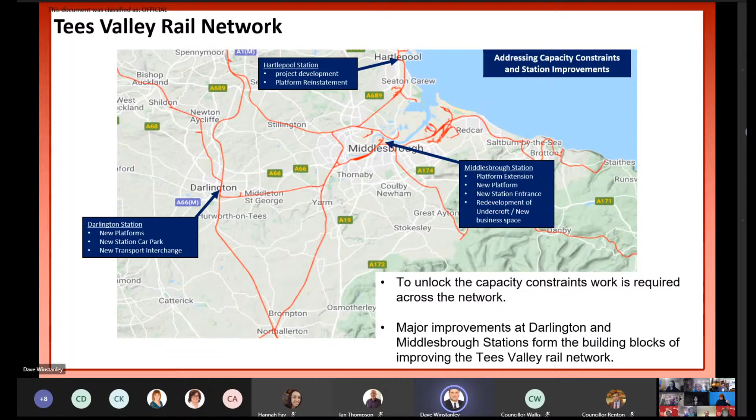Part of the Tees Valley strategy requires some capacity constraints to be unlocked. The key ones, and the foundation for this plan, are at Middlesbrough and Darlington. I'll be talking about the Darlington Station plans today, but there are similar plans and projects going on at Middlesbrough, and some development work being done at Hartlepool, where they've got a single platform station and potentially need further platforms reinstated.

So the project objectives go back a number of years - we want to transform Darlington train station into a modern transport hub. It hasn't had significant investment for a number of years now, and we really want to transform that into a new station fit for the 21st century. We want more frequent and faster local and national services, but we also want to future-proof the station for the needs of the railway in the future and make sure those local services can continue to be used.

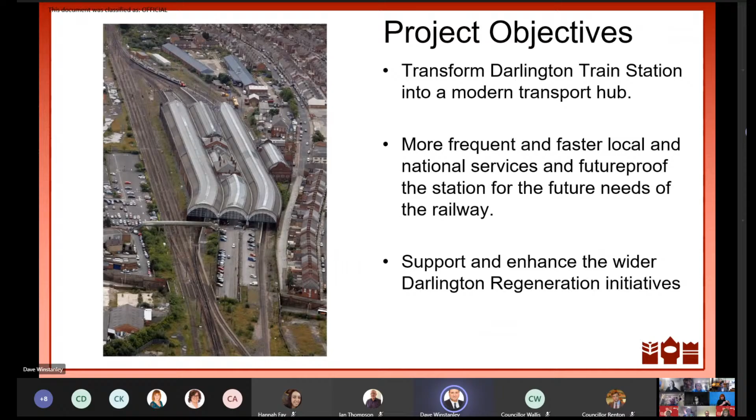We also want to support and enhance the wider regeneration opportunities that an East Coast mainline station gives to Darlington and the Tees Valley.

The next slide shows how it all fits together, and I know you've got a presentation later on about the Railway Heritage Quarter - but the station's a key component of our regeneration plans. The blue area there is the station project. We've got Central Park, which is growing and developing fast - we've just recently put the bridge across there. We've got the theatre that's recently been refurbished, and the children's theatre on Parkgate. We've got the town centre strategy coming forward, and all those linked together form our strategy going forward to regenerate and bring forward Darlington.

Tees Valley, Darlington is the only East Coast Mainline station, as I've said before, and it's a potential future Northern Powerhouse Rail and HS2 station. That will give much wider and faster access in the future to the rest of the country, making Darlington a very accessible place.

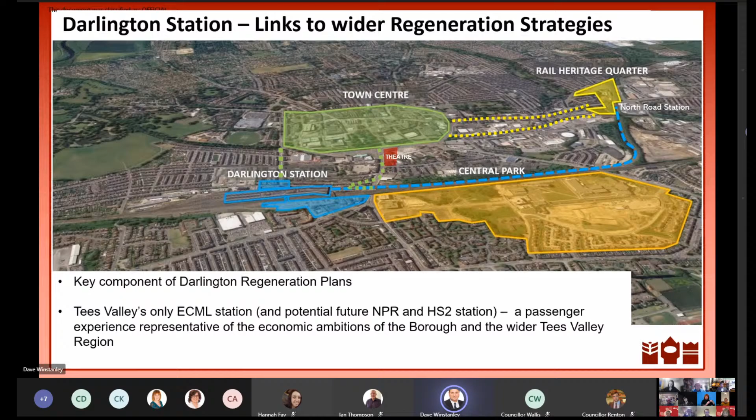If and when HS2 arrives in Darlington, that will cut the journey time to Birmingham by 52 minutes, making it 1 hour 29. It will cut the journey time to London to 1 hour 52, saving 28 minutes. So we're preparing to accept that greater accessibility.

This is a bit of a technical slide just to explain the current configuration at Darlington Station and why the current arrangements cause problems between local services and national services. The blue line is the East Coast Main Line. Darlington Station is on the west side of the East Coast Main Line, which means anything coming from the Tees Valley has to cross the East Coast Main Line to get into the station at South Junction. So Tees Valley lines have to cross and get into Darlington Station, either docking in the bay platforms 2 or 3, or platform 4.

What that means is it takes a lot of time out of the East Coast Main Line for a slow-moving passenger train to get across the South Junction and into the station. That takes up a lot of capacity for national train services going north-south, up and down the East Coast Main Line. Similarly, at North Junction, you've got to cross the Scotland-bound line to get into the station, which once again causes capacity issues on the East Coast Main Line, limiting the amount of services that can run.

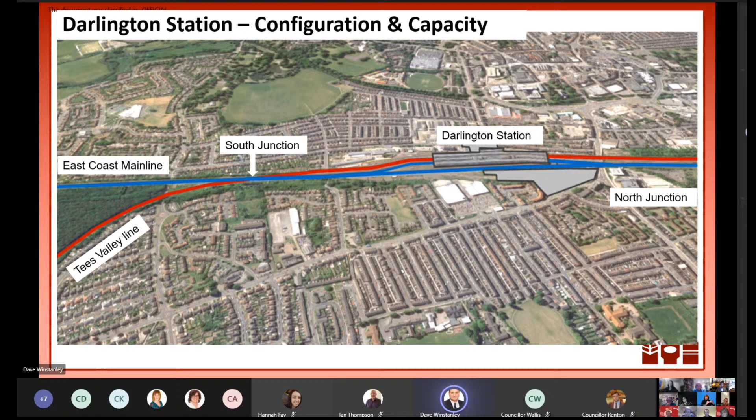So what we've done in terms of design and a solution to that is develop a new arrangement. The new configuration at Darlington Station will see the Tees Valley line brought round parallel to the East Coast Main Line and come into new platforms on the new station.

There will still be the facility to cross South Junction if there's capacity, and come into Darlington Station and go off along the Bishop line if there's capacity to get across that South Junction. There will also be provision for a new London-bound platform built on the east side. So if you're going into the Tees Valley or London in the future, you'll use the new station, and if you're coming to or from the Bishop line or going into Scotland, you'll use the existing station.

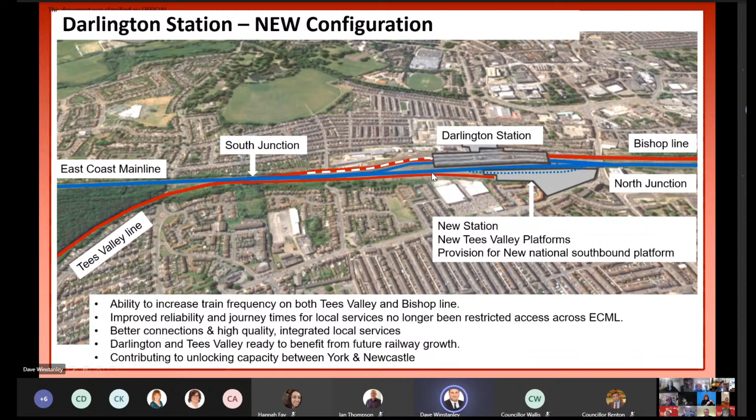That removes the need to cross the East Coast Main Line and creates capacity to expand services on the Tees Valley line, the Bishop line, and the East Coast Main Line. In terms of project delivery, we've split the project into a number of stages or elements.

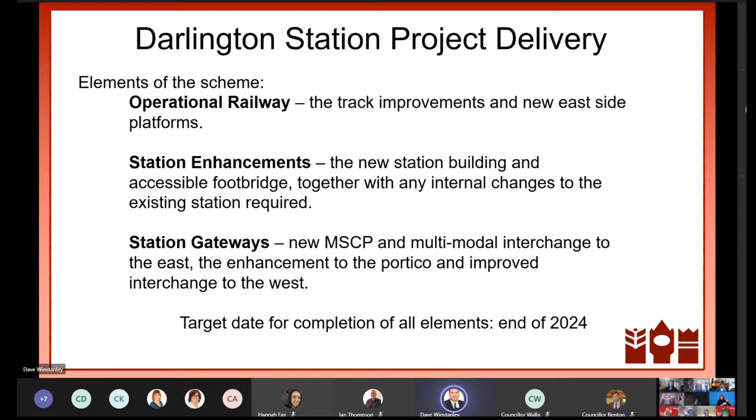We've got the operational railway, which is track improvements and new east side platforms; station enhancements, which is the new station building, an accessible footbridge linking the new station with the old station, and internal changes to the station; and the station gateway project, which is a new car park, a multimodal interchange, and enhancements to the portico, an improved interchange on the west side. Both approaches from both sides of the station are improved with transport interchange, and the target date for completion is the end of 2024.

I'd like to take you through the various elements of the project quickly so you understand what's going on. We've broken it down into various stages. We've got the Victoria Road interchange, and the Victoria Road improvements that are ongoing at the moment. They improve the pedestrian and walk-in route to the town centre, which is a key link into the town centre strategy. So the Victoria Road interchange will see better pedestrian, cycling, and bus interchange provided at that location.

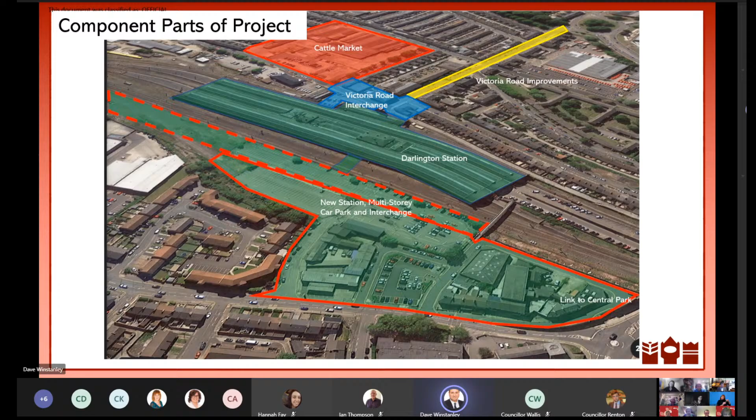We've got Darlington Station itself, and we've got the new East Side interchange and station. For Station East, as we call it, the new station, you'll have provision for an East Coast Main Line South platform, and the Tees Valley platforms. We'll have a new station building with modern facilities and retail, and a new bridge from the new station to the existing station, going through the shed and into the area where currently Pumpkin and WH Smiths are based, landing there.

We'll have a new multi-storey car park that provides capacity to help with rationalisation of parking, because we don't want parking in the portico area or up and down the ramp. There's a new transport interchange for pick-up and drop-off and bus replacement services, and we're also looking at improved walking and cycling links throughout the station.

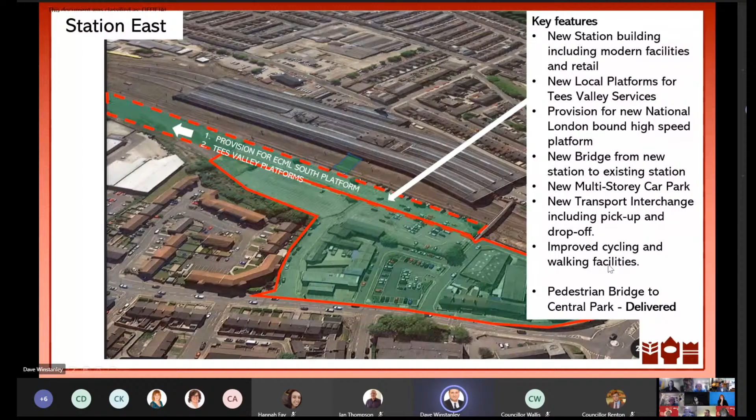In terms of the station itself, we've got the portico improvements. We want to make sure the station's got access-for-all enhancements. Currently the ramps, steps, etc. aren't particularly disabled-friendly, so we want to introduce lifts and facilities that make it accessible for all. We're working on the customer experience to enhance that, and we're looking at improvements to the subway from the improved portico area.

We're looking at rationalisation of the parking and access to make it a friendly environment in the portico. Most people who've used the portico entrance on Victoria Road have probably had to dodge cars dropping off and other vehicles going in and out of that area, which is very tight, and reversing cars from the parking spaces, etc.

There'll be a bridge, an accessible bridge throughout the station, making the interchange between platforms efficient and effective.

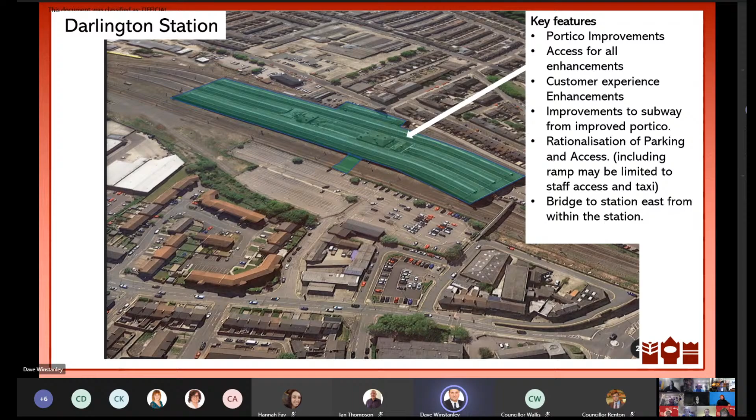At the Victoria Road interchange, we're looking at new pick-up and drop-off facilities to replace the ones in the portico, new bus stop facilities, walking and cycling improvements, and an improved public realm. The first impression of Darlington for some people is as you walk out on Victoria Road, and we want to improve that feel, look, and public realm, and make it a pleasant walk down to the town centre.

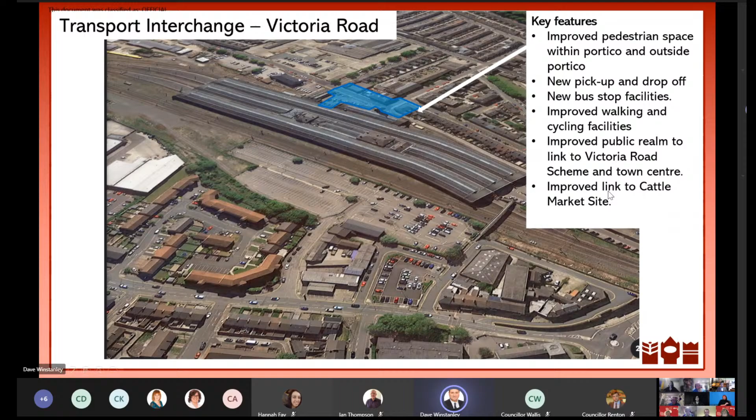It will also provide an improved link to the cattle market site, which has recently come into the council's ownership.

In terms of delivery, there's quite a significant project management and governance structure around this with all partners: TVCA, DFT, Network Rail, London, LNER, Northern. The project's been run in two phases. Darlington Council will design and build the station gateway on the east side, including the multi-storey car park, the station shell, and the interchange, through the SCAPE framework.

25 million has been allocated from TVCA to be committed by March 23. The current milestones are starting the CPO process in January 21, getting planning permissions in spring 21.

Construction begins winter 22, operational March 24. In terms of the major rail and station enhancements, that's led by Network Rail, who have engaged BAM Nuttall for a design build process. The DFT have allocated up to 8.7 million for the design stage. Their targets are getting a decision to deliver September next year, completing the design June 22, construction starting January 23, with construction complete in May 24 and the new track and station operational December 24, ahead of the celebrations for 2025.

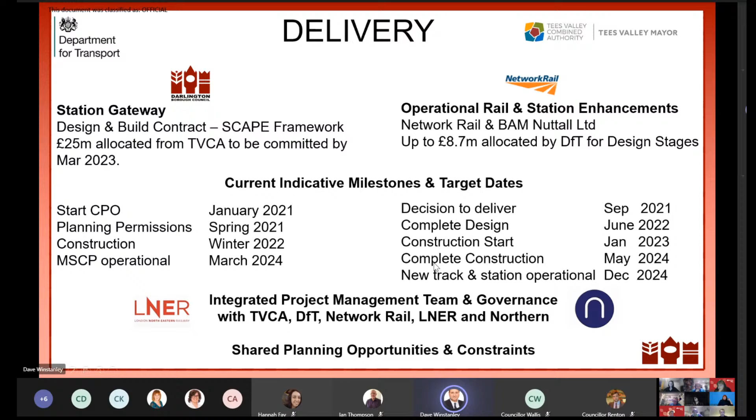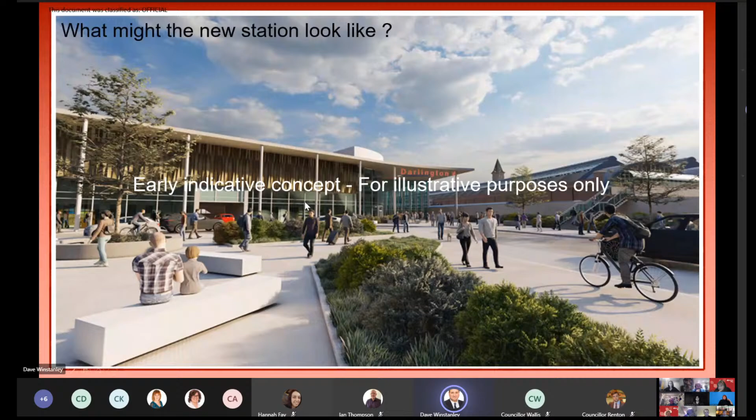That's an early indicative concept. It will change, but it shows the new station on the east side with the multi-storey car park, entrance to the station, new platforms, a bridge across, and the public realm, which will have a transport interchange. Thank you, Chair.

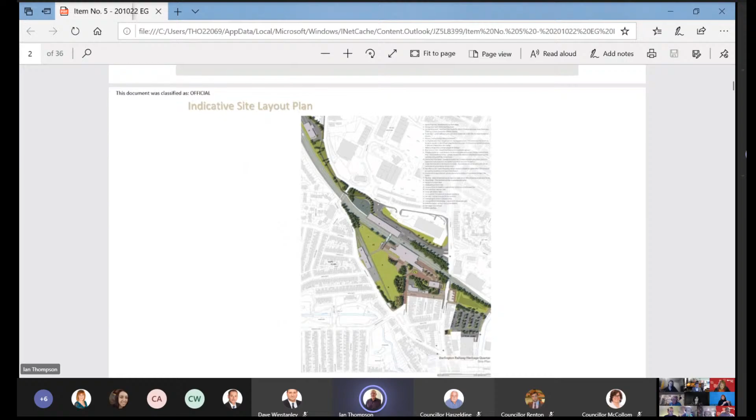Members will have seen the site in previous presentations. Again, this is just to remind members, you've got the car park area here, which will be developed as part of the scheme. The logic for that is because it sits right next to the Skerne Bridge, so we want people arriving by car to start the journey with the Skerne Bridge, which, as you all know, is the oldest operating railway bridge in the world. We'll have interpretation down here and potentially virtual reality where you can point your phone up at the bridge and see loco number 1 going across there.

We'll walk up and across North Road. There'll be a new crossing on North Road at McNay Street. McNay Street will be closed to through traffic, and it will be for residential only. You will enter the site through the goods shed, and McNay Street will be reprofiled. You'll have a plaza between the goods shed and the Head of Steam Museum.

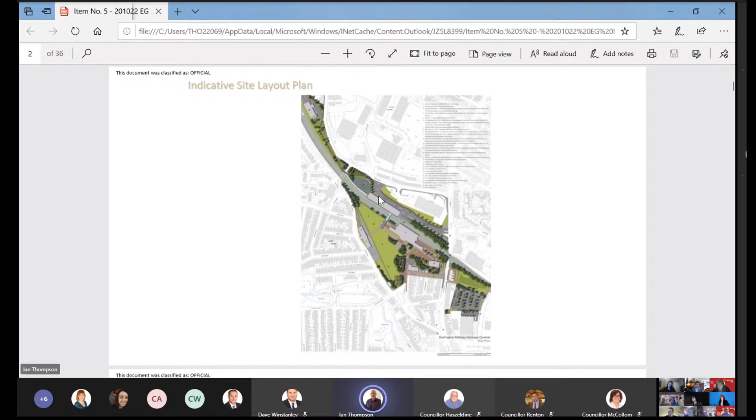We'll have a new build shed over on Bonomi Way, on the other side of the railway line, which the A1 Trust will be relocated into, with a bridge going across and landing within that building. Then at the bottom end of the site, you've got the old 1861 shed, where we are looking and working with DRPS and NELPG, and they will relocate into there. There'll be a private siding coming off the main line that will feed the 1861 shed and also the new A1 Trust shed, so we can run steam on it, and they can bring engines in without necessarily having to use low loaders.

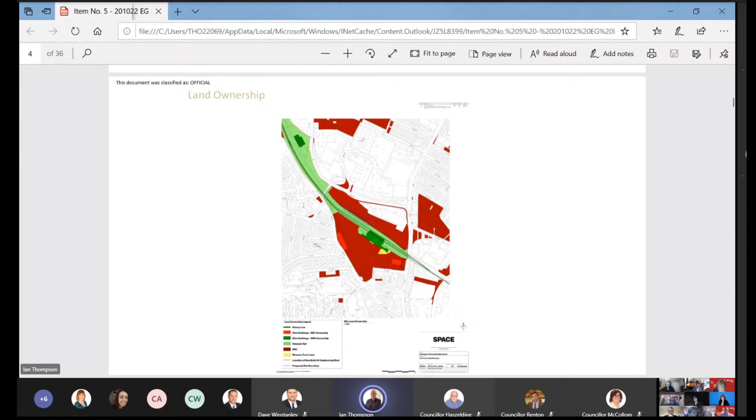This shot here is basically the land ownership. The pale green is what's in Network Rail's ownership, which we're currently negotiating with them regarding what land we want from them, and also the two dark green buildings. The 1861 shed is Network Rail's, and also the Head of Steam is Network Rail's building. We have a 200-year lease on that building, of which I think there's about 150 years left, so we as good as own it. We obviously own the goods shed and the carriage works, and the purpley brown is the land that we own. There's a small yellow bit within the site that is Museum Trust land that we're currently in negotiations with them to acquire.

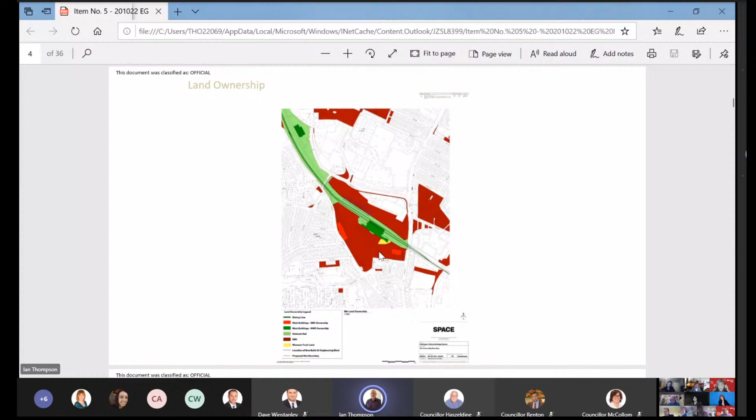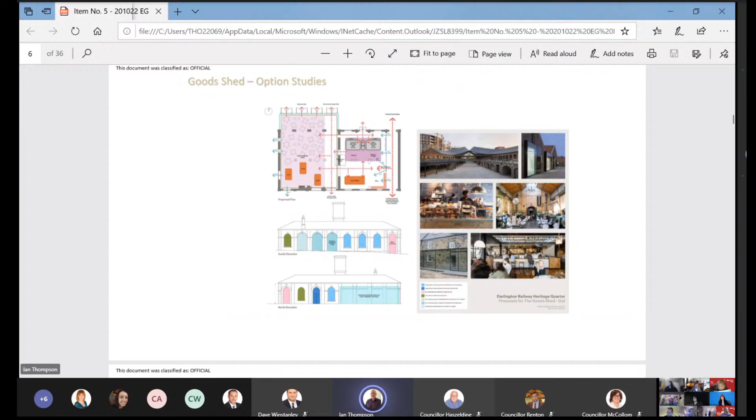Moving on to the specifics of the site, the first building here is the goods shed, which is the one where we will enter the Railway Heritage Quarter. You will enter the site through one of the archways, and the intention is that you'll be able to go all the way through here and onto the rail platform, so that anybody going on into the rail station will pass through the site.

Or you can turn left into the goods shed prior to getting the train, if you wish to grab a cup of coffee and off you go. You'll also still be able to access the railway platform from the corner of McNay Street and North Road, for when the goods shed is closed, so people can still get access to the platform. Within the goods shed, we'll have the catering cafe facility, as well as secondary retail spend, shop, and toilet facilities as well.

The orangey coloured splodges on here are just indicative. Obviously you'll have objects, so you might have some trains displayed in here, and other appropriate objects displayed within the goods shed, and then a cafe laid out.

On this plan, some of these things may or may not come to fruition as we move forward. There's obviously a glass frontage put onto the goods shed to extend the footage there, but not interfering with the structure of the goods shed, and retaining all its features.

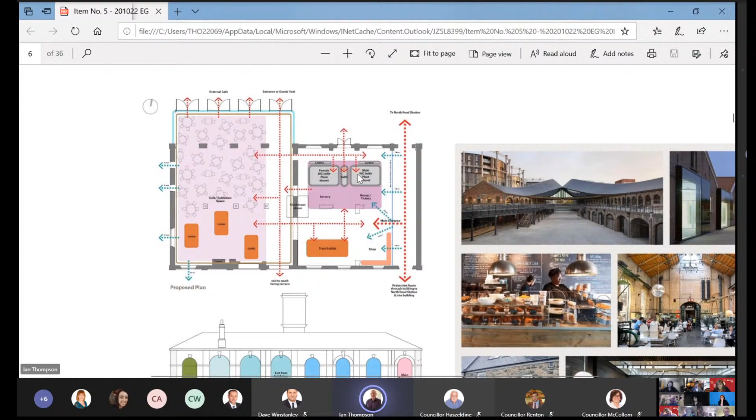Any interventions we make won't necessarily touch the fabric of the goods shed other than the floor. So in future years, when things change, those can easily be taken out, and ultimately the goods shed is as it was. We're not intending to make any significant structural changes. And with it being listed, we've got to work through appropriately with conservation and Historic England.

Looking from McNay Street, this is the elevation you would see, and then looking from the head of steam site, you'd see this elevation with a glass extension on the side.

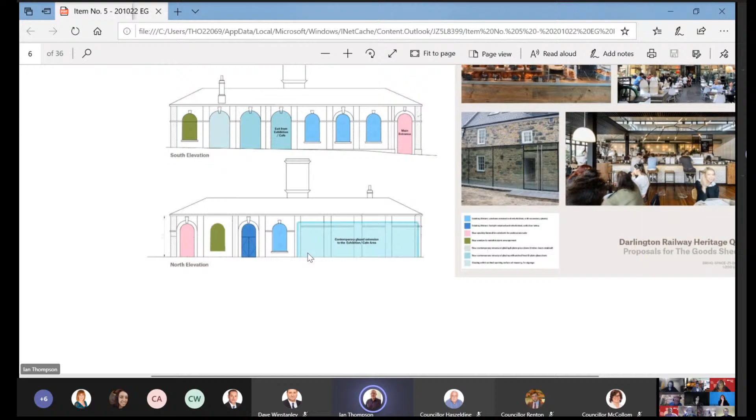Moving on, these are again sort of artist impressions of what it may well look like, so don't hold me to account. These are just early impressions, concepts.

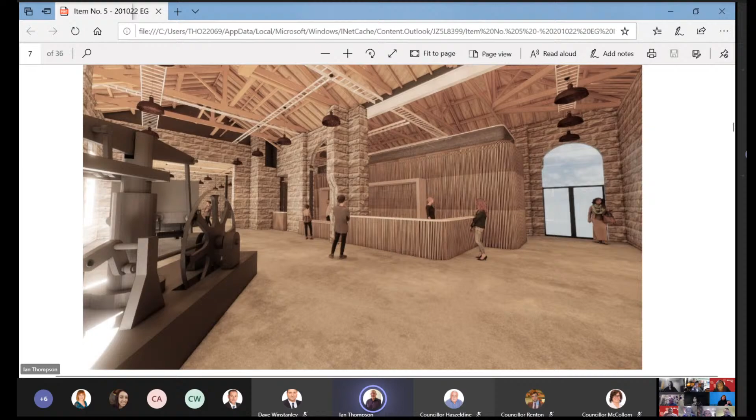As you see, the doors in this corner will be where you walk through onto the railway station, or you turn left into the goods shed, with your counter and catering in this particular area, and exhibits. Then as you go through on the other side, you've got your cafe area, and again exhibits throughout.

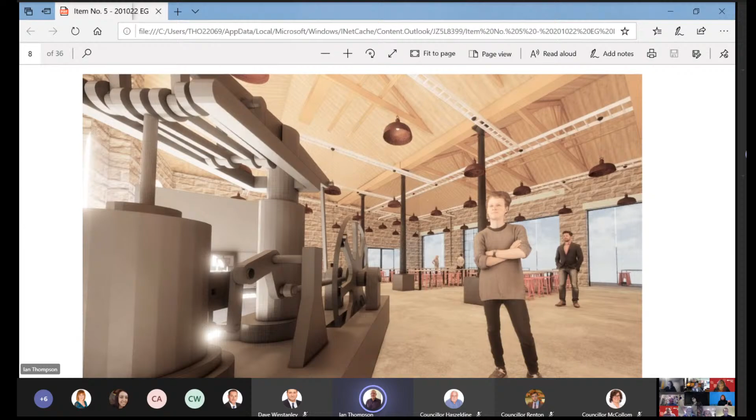Again, the key is to actually celebrate this building, so the building is part of the experience as we go through.

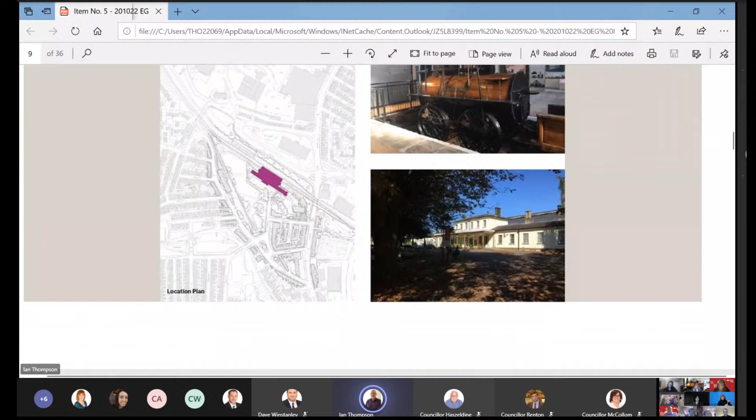Moving into the head of steam itself, the museum as is, this element of the project is the least developed at this moment, and the reason for that is we wanted to be in a position where we had the interpretation designers on board, because the interpretation design is key to making this the element we want.

This is where you're going to get the wow, and you're going to get the experience of the augmented, the virtual reality, and everything else within there.

As we've talked about before, potentially what that will be is you'll go into something that looks like a railway carriage, and you will sit in there surrounded by screens and projections, and you will also experience smells and heat and everything else. Ultimately you'll probably start travelling on the back of loco number 1 in 1825, work through time, and end up, however, in 2135, or whenever it is, who knows.

Part of the creation of some of the stuff we want to do in here, we want to use local residents to be part of these films. So you bring local people into this process, and there'll be variants of the ride - some might be Easter themed, Halloween themed, Christmas themed.

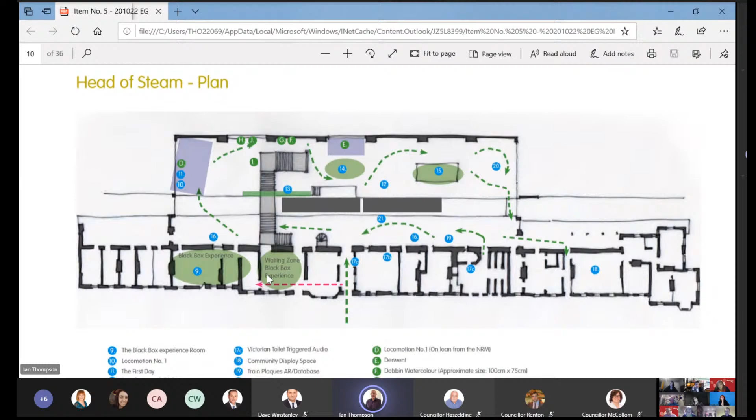Once we get a little bit further down the road on interpretation, I'll bring a presentation back for members to go through exactly what that's starting to look like and how that's developing. Again, these are just concepts of potentially the head of steam visual as you walk in there.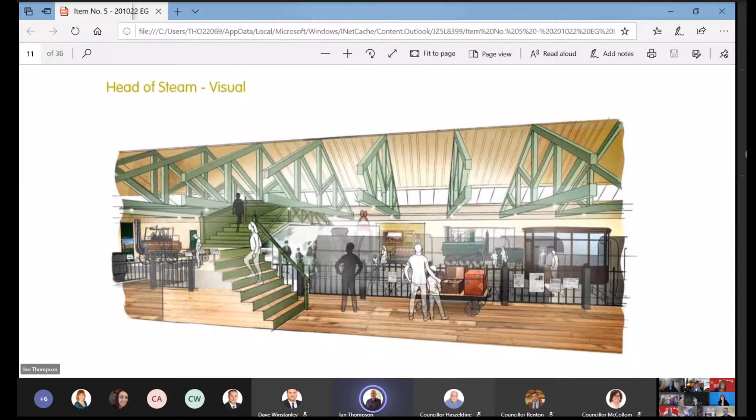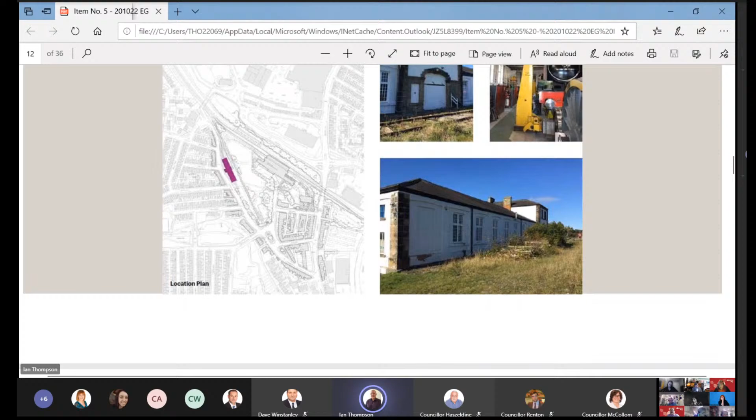Moving on to the carriage works, where currently A1 Trust and NELPEG are located. On the left hand side here will be an open exhibition gallery space for changing exhibitions, and on the right hand side will be the archive and some study rooms and meeting space for the archive, and also for working with partners in utilising that space.

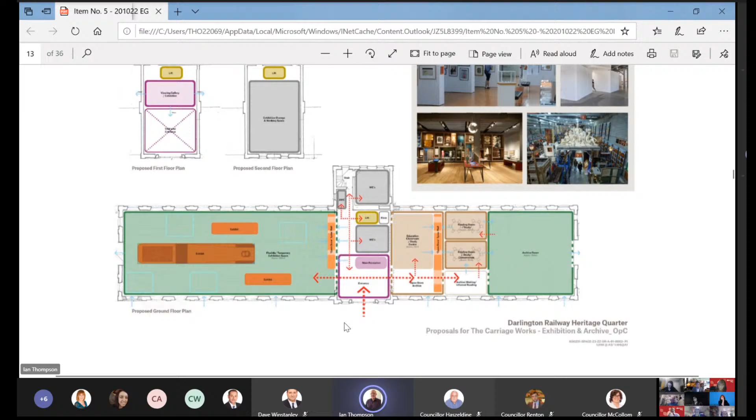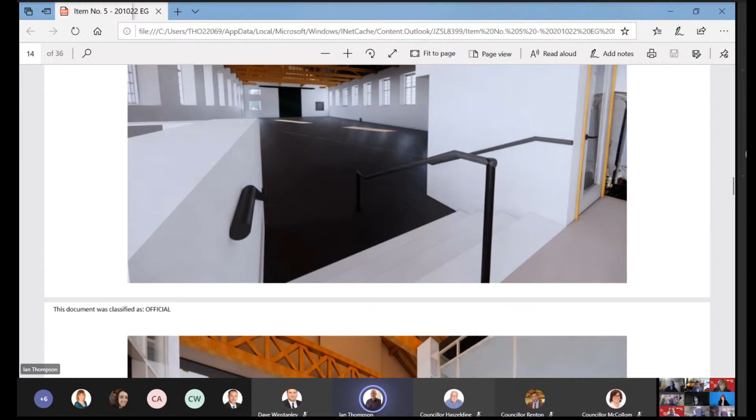Certainly probably in 2025, this space and potentially the archive space will be an ideal area to display the early engine exhibition we're looking to create, which we'll talk about later in the presentation. These are just visuals of what the space could look like - left hand side where A1 are, the open exhibition space, and the other side with the archive and meeting rooms and study rooms.

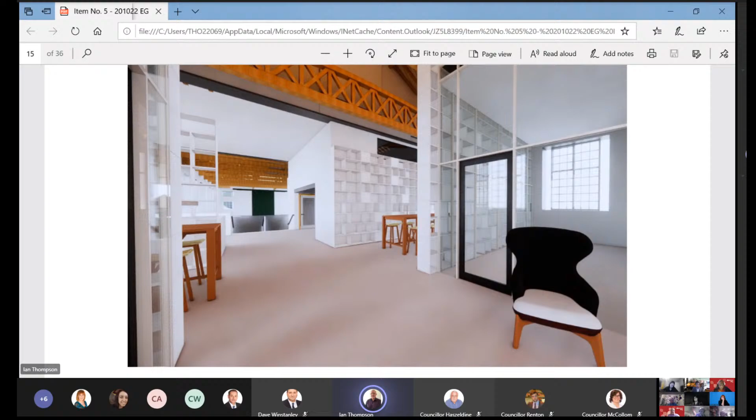Obviously the building itself tells the story. We'll not be making significant interventions into the buildings because the buildings are part of the authenticity and enjoyment of the site, and they are historic in their own right as a collection of buildings.

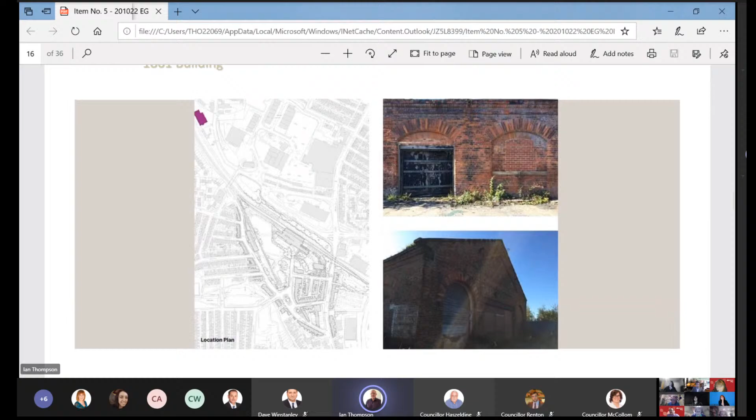Then the 1861 shed - if members aren't sure where that is, that's just off Whessoe Road, just past where the scrapyard is. We're in discussions with Network Rail about acquiring that, and ultimately we'll be looking to relocate NELPEG and DRPS in there, who we're working with at the moment. These are very early sketch drawings of where we're at in this process - we'll be looking to split that shed, one organisation in one side and one in the other.

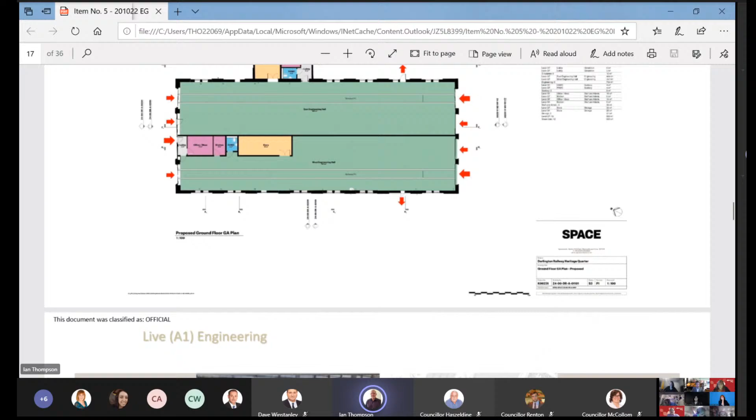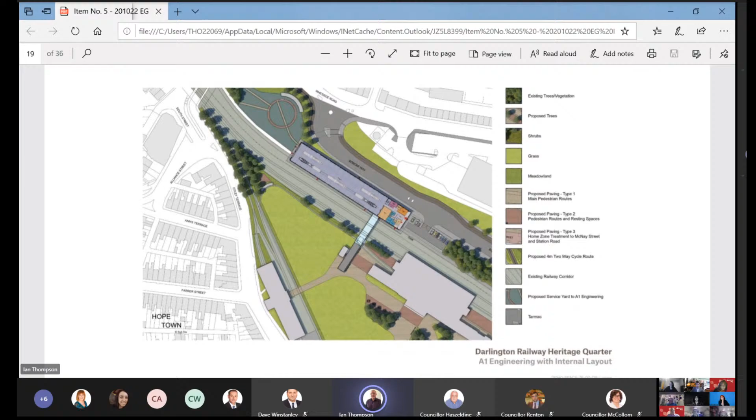This element here is a bridge going across the railway line, so you can get from here across to this side of the site, and you'll land at the top of this building here, where A1 will be located. You can see your tracks coming in with a turntable as well. Again, these are just sketches, but an artist's impression of the potential types of buildings and bridges going across.

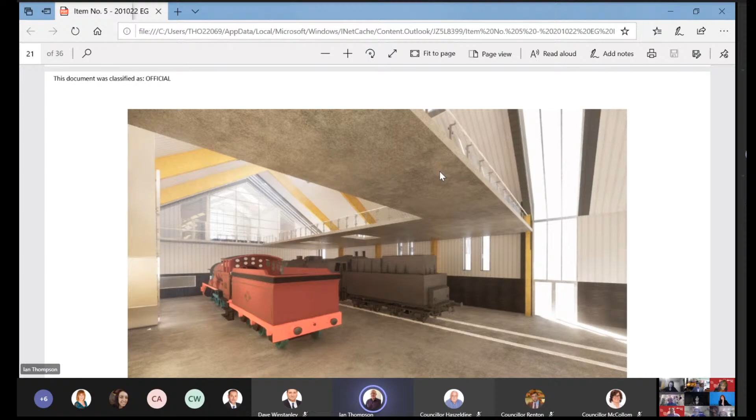Within that building, there'll be a viewing gallery above, so visitors to the museum and site will be able to go into that building and see what's going on underneath in the A1 - whether that's engines in there, work going on and building, and so on. People will get the opportunity to look in there, with interpretation as well.

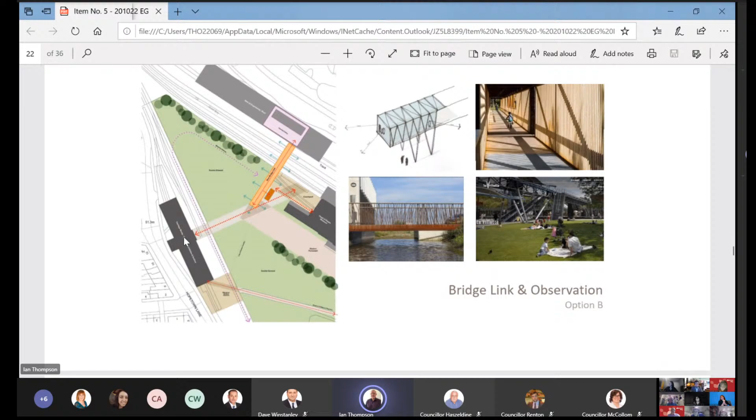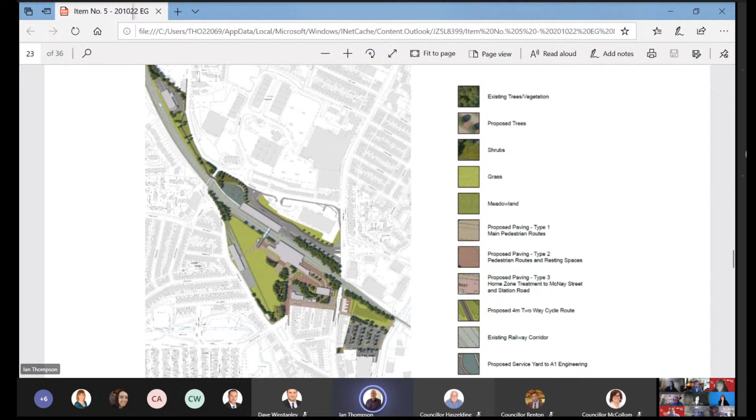In terms of the site, this is just showing the types of potential finishes we're looking at, where you've got hard landscape, car parking and other areas, plazas, and in some areas wildflower meadows and grassed areas. This slide is just showing the types of finishes we're thinking of currently for the landscaping areas, making the site appropriate and fitting for everything that's going to take place.

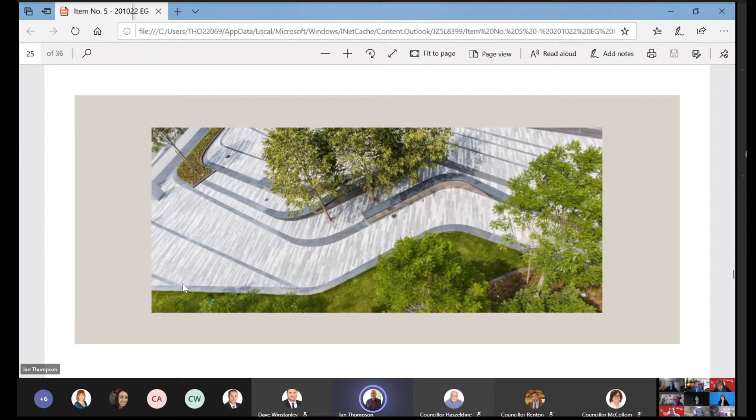This gives an indication of other sites where you've got paths weaving through wildflower meadows and meadowland. These are just precedent-type shots of types of landscape, and as you can see here, they're using the lines to reflect what tracks might be, through the hard landscaping as well.

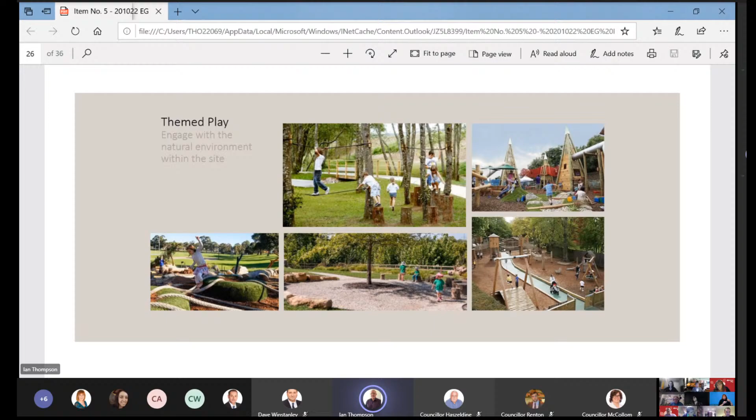And again, the trees will be brought into that experience as well. We'll be going out in the new year to engage expert designers in terms of outdoor play provision, because ultimately what we want here is something that isn't any play area in any town. It's something that really is meaningful, and it creates a wow feature in itself, a feature that children want to come back to regularly, which means mum and dad have got to come with them, and therefore experience the site and use the other facilities on the site.

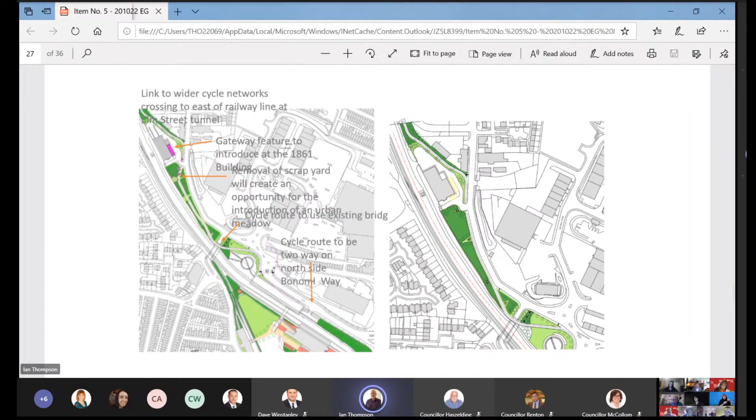One of the other features of the site will be that the wider Stockton and Darlington walking and cycling route will come through the site. It will come through from the 1861 shed, go through the site, cross the bridge that goes under the railway here, near as opposite McDonald's. So the private rail siding and the walking and cycling route will come across that bridge onto the rail heritage site, cross over Bonomi Way, come down and then come back round, and then ultimately the walking and cycling route will go off through the rest of the town and continue its way through to Stockton.

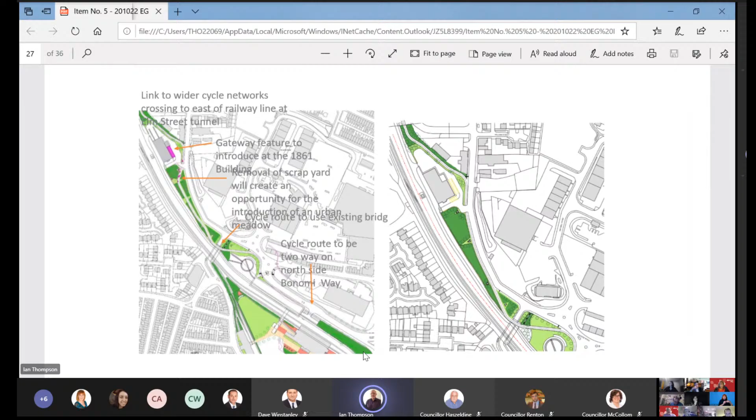Again, just some concepts of how it may well look in terms of the walking and cycling going through the site. So again, a real great opportunity. Going through the site means that the visitors or people using that route will pass the site and hopefully come and see the site, use the site, and spend a few pennies while they're there. So that gives a real overview of where we're at in terms of the development of the Rail Heritage Quarter.

As we sit here today, we will probably be starting on site summer 21. The work will start on the Bonomi Way side of the site, where we will be putting the new shed and also refurbishing the 1861 shed. Once they are built, that will then allow us to move our partners, DRPS, NELPEG and A1 Trust across, and then we will start on the Head of Steam side of the site to refurbish those buildings.

And create the outdoor spaces, the play areas and everything else, with a view ultimately for the project being finished towards the back end of 2023, early '24, in real good time before the 2025 celebrations, because the last thing we want is to be running right up to the wire. So we're in a position now where we are comfortable that this will be delivered, finishing late '23, early '24. Moving on to 2025 celebrations, we've started some of the work around that, because while 2025 seems a long time away, it will certainly be here before we know it, given the scale of our ambitions as we sit here today.

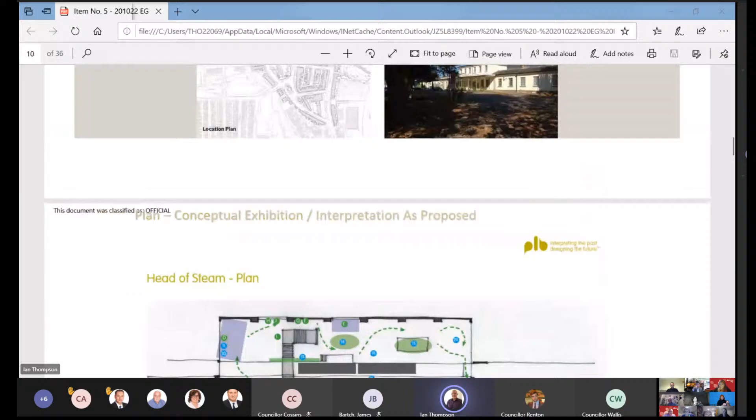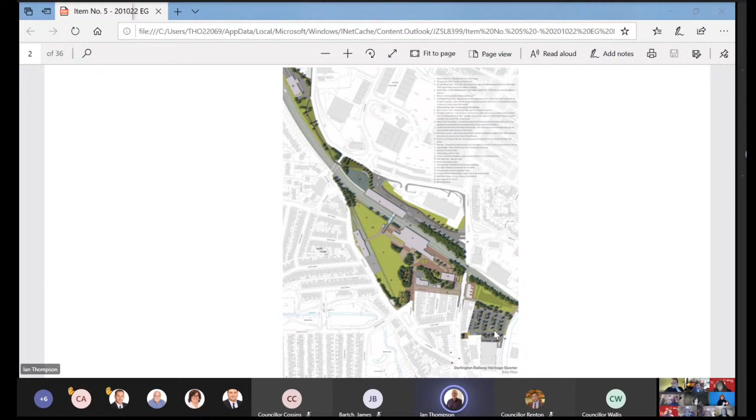So this is going to be the landing point for cars coming to the car park to the side. Cars will park here. We've gone through lots of options - can we use the existing site, should we look at other options? But there's real strong logic for a car park being there, because you're actually landing right next to Skerne Bridge, which is the oldest operating bridge in the world. Nobody else has got that, nobody else can tell that story.

If you come by car, which the reality is certainly for the foreseeable future people are going to be using, eventually hopefully people move away from cars and more arrive by train, which they'll cross Skerne Bridge. So that's where the car park is. So they'll have to cross North Road to get there - there's going to be a new pedestrian crossing on North Road to facilitate that, and there's a study underway with colleagues in highways looking at that.

I'd simply observe, Ian, that on 250,000 people a year, some days you're going to have upward of 1,000 - summer you'll have over 1,000 visitors a day. I would imagine that would be the ambition. There'll be coaches as well as cars, we'd hope. Clearly there's more room there than we have at the moment, but that's not a big car parking area for the exhibit in terms of the ambition and the numbers we're looking to attract. That's something we're going to do more work on.

Maybe you could come back on the issue of community engagement, Ian, because from memory, community engagement, particularly in Northgate and North Road, was key to unlocking some of the grant money. It's important that residents in Northgate, especially south of the site, feel this is part of their community and they own it. I've seen the 45,000 mentioned for the school work, but there's further to go on ambition for community engagement with ward councillors and other community leaders. Could you flesh that out a bit more?

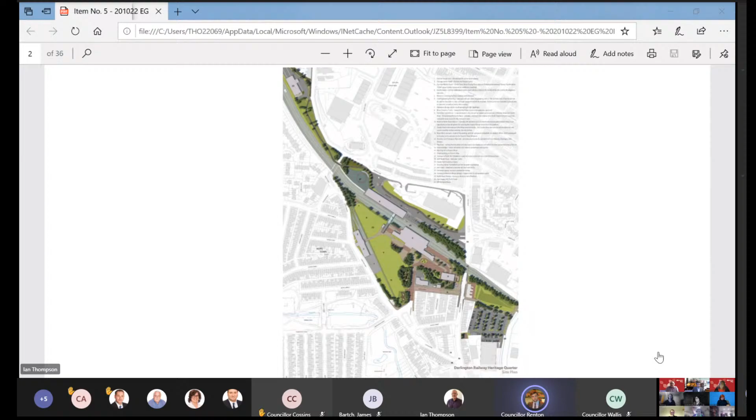Okay, I'll wait for that. Okay, thank you, and thanks for your patience, councillors. So, Councillor Allen, please. Thank you, Chair. Just three points, if I may, Ian.

On all of the exhibits, including what looks to be a fantastic little themed play area, have we or will we make sure that every kind of disability can be catered for, including the visually impaired and their guide dogs? That's the first one.

The second point was where you showed the slide on the early locomotive exhibition. You mentioned an event that was going to progress, as it were, from Easter and through till about October half-term time. Is that just for 2025, or will that be perhaps an annual or biannual event?

And my third and last point was on the slide headed live steam. It isn't that I don't like what I'm seeing, because I do, but it does seem a little bit ambitious in the time limit we have, and it also reads a little bit like a wish list. So I wondered how much of it you'd managed to pin down yet, if I may.